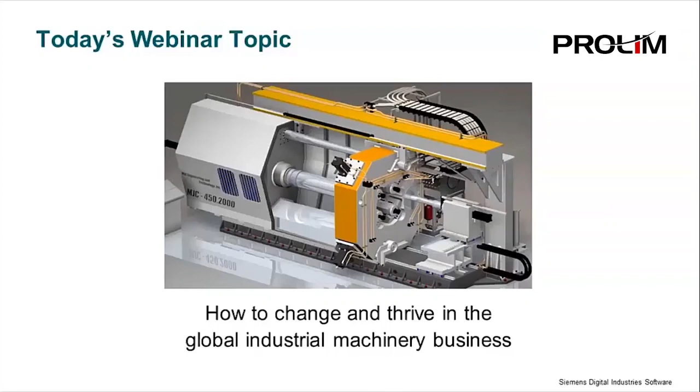I'd like to welcome you to today's Siemens Global webinar. Our topic is how to change and thrive in the global industrial machinery business.

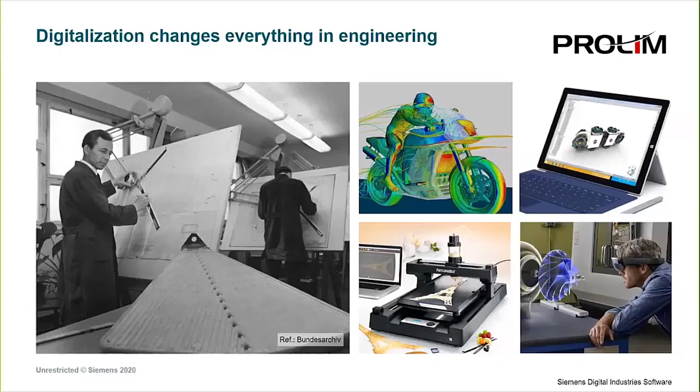And in the manufacturing area, we see trends such as the smart factory, where products going through the manufacturing process report on their status, and the equipment used to manufacture the products also reports on their maintenance and quality issues. We also see increasing deployment of new manufacturing processes involving, for example, additive manufacturing.

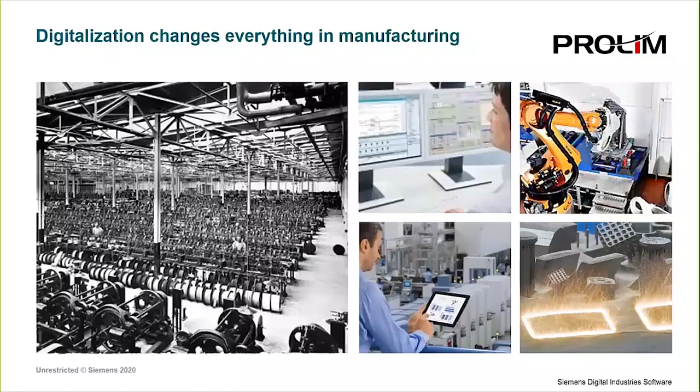And these new technologies are also being deployed for testing and installation. This is sometimes referred to as virtual commissioning, and it enables manufacturers to validate product performance before shipping the product to the customer.

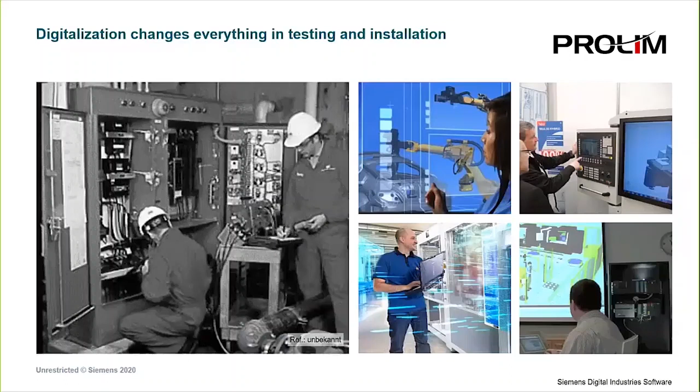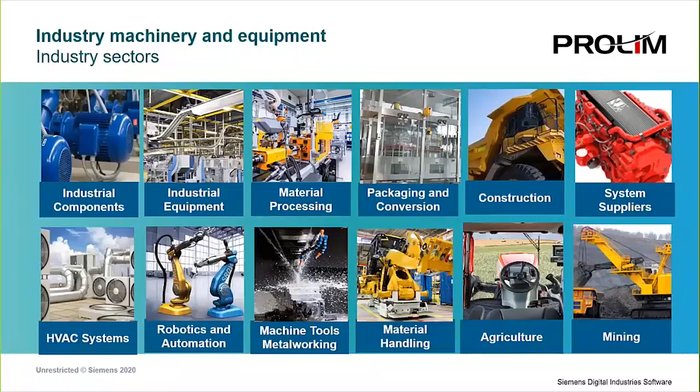Products have changed and the market has changed, your customers have changed. The question we would ask you is, have your engineering processes evolved to meet these changes?

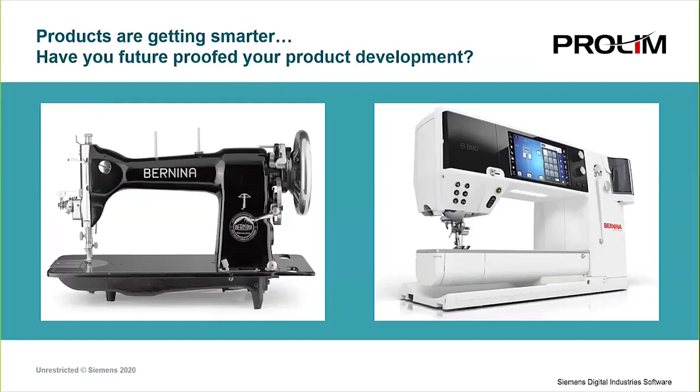A key part of the solution proposed by Siemens is to create a digital twin of your product. This is a detailed 3D digital model of your proposed product. The digital twin can be used as a basis for all areas of product development, including managing customer requirements, concept and detailed design, simulation, manufacturing, installation, and service.

We will discuss how the digital twin helps manufacturers address the challenges they face to bring new products to market quickly and efficiently.

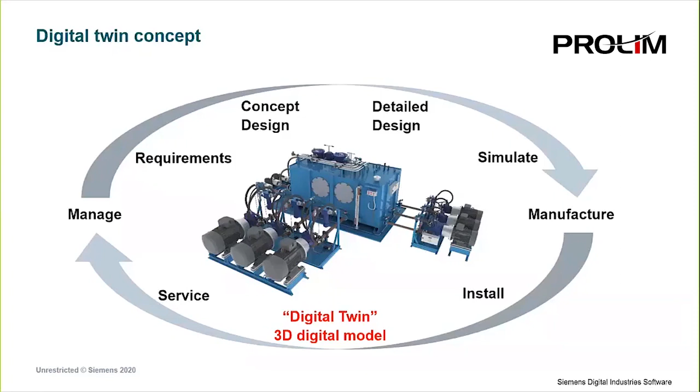At this point, we'd also like to introduce you to Solid Edge, a portfolio of affordable, easy-to-use software tools that address all aspects of the product development process. Solid Edge combines the speed and simplicity of direct modeling with the flexibility and control of parametric design, all made possible with synchronous technology.

Solid Edge enables you to implement the digital twin concept that we saw on the previous slide, enabling digital transformation for startups, small and medium-sized manufacturers, and departments of large enterprises. And Solid Edge is a cross-industry solution used in many different manufacturing sectors.

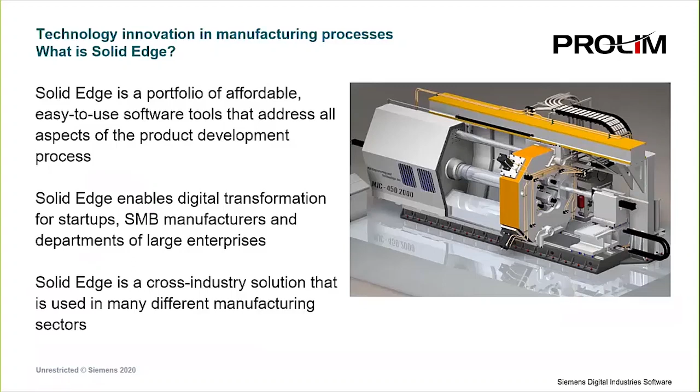Now we'll look at three key trends impacting manufacturers and propose some solutions. The first trend is end-user demand for customized products, resulting in demand for more highly customized machinery. The second trend is increasing electrical content to meet customer demands for more customized and connected machinery. The third trend is increasing pressure to track fulfillment of customer requirements and prove compliance with industry regulations. The impact of these three trends together is increasing complexity of machinery and equipment, and increasing complexity of product development processes.

So what is the impact of this increase in product complexity on the manufacturers of these products? Research from industry analyst Tech-Clarity showed that increasing product complexity can slow the product development process, resulting in delayed time to market, lost revenue, project budget overruns, and poor product quality.

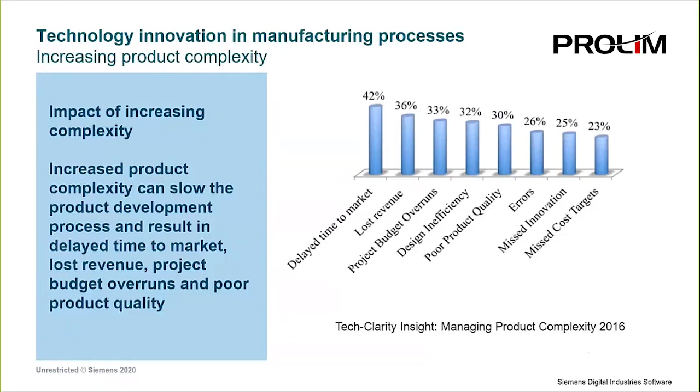We will now look at the trends driving increased product complexity and their solutions in more detail. The first of these three trends is end-user demand for customized products, resulting in demand for more highly customized machinery.

Here is more research from industry analyst Tech-Clarity. This research focused on how top performers in manufacturing differentiate themselves from their competition. The research showed they do this by being faster to provide quotes for their customers, and faster to deliver the final product. These manufacturers also have the capability to include higher levels of customization in their products.

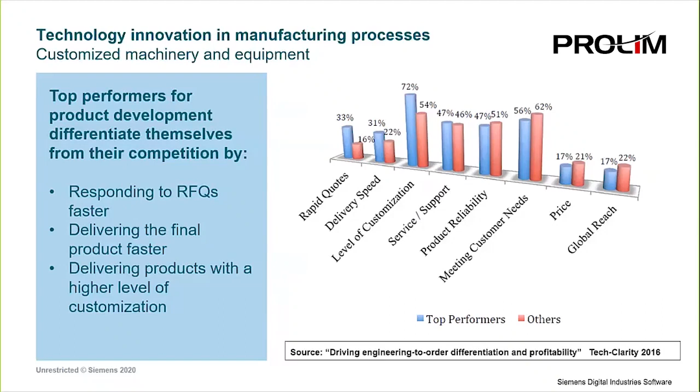Let's look at the challenges, how we can help, and the benefits we see manufacturers achieving in this area. The key challenge is for manufacturers to efficiently engineer products that meet customer specifications while meeting delivery schedules.

We can help by helping you configure products based on family of parts and family of assemblies defined in 3D CAD. This is the basic entry point. We also have more sophisticated solutions, for example, managing options, variants, product configurations, and product costing using an integrated PLM solution. And we have solutions that enable you to automate new product designs using advanced engineering-to-order, or ETO, processes and automation technology.

The benefits manufacturers can achieve include reusing proven components in new design projects. This enables them to reduce risks and speed response to customer RFQs, as well as improve order engineering lead times, throughput, and costs.

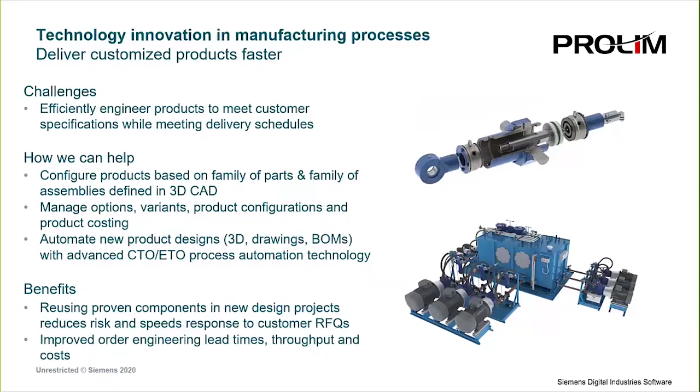Let's talk more about configure-to-order, or CTO, type processes. With CTO processes, the primary design challenge for manufacturers is selecting the right product based on the customer-specified options, where all of the parts have already been designed, or at least defined as families of similar parts and assemblies.

The enabling solutions in this area are based within our 3D CAD solution, including the ability to create family of parts and family of assemblies within the CAD environment. These are typically driven by Excel spreadsheets or variable tables. Specifically with our Solid Edge 3D CAD solution, we refer to these as Solid Edge family of parts and Solid Edge family of assemblies.

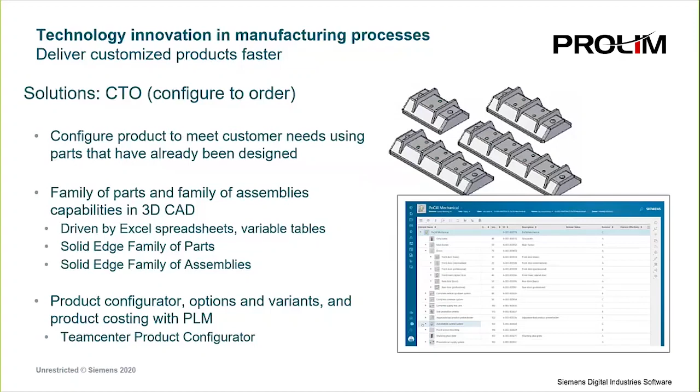The next level up is using a PLM solution, in our case Teamcenter Product Configurator, to actually enable you to drive product configuration, options and variants, and even product costing as well. So that was the CTO, or configure to order, area.

The next area of complexity is engineer to order. With ETO, the primary design challenge is rapidly designing new parts and assemblies to meet unique customer specifications based on your own engineering and manufacturing capabilities. Here we have a solution called Rulestream, which applies standards-based engineering to enable you to support custom manufacturing.

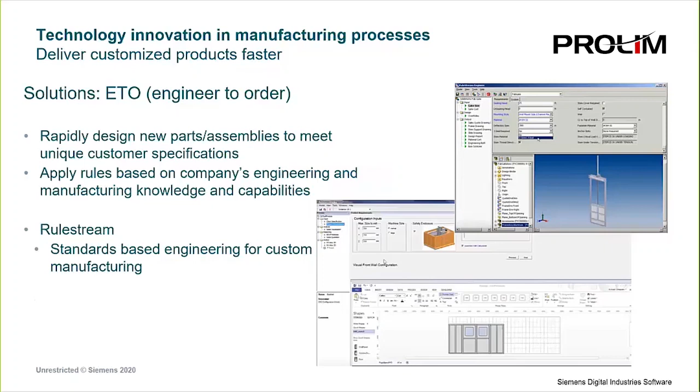The second area that we'll look at in terms of trends impacting manufacturers is increasing electrical content, required to meet customer demands for more intelligent and connected products.

Here are some results of a recent survey of design teams run by engineering.com. The survey asked about the value attributed to electrical and electronic systems in current design projects. The majority of respondents, 71%, all design engineers, said that the value attributable to electrical systems in their products is increasing, and fully 37% said that the value attributable to electrical systems is increasing significantly. We forecast that this trend will continue to grow.

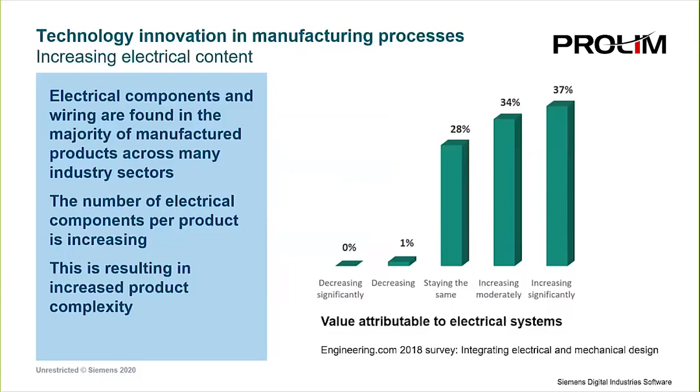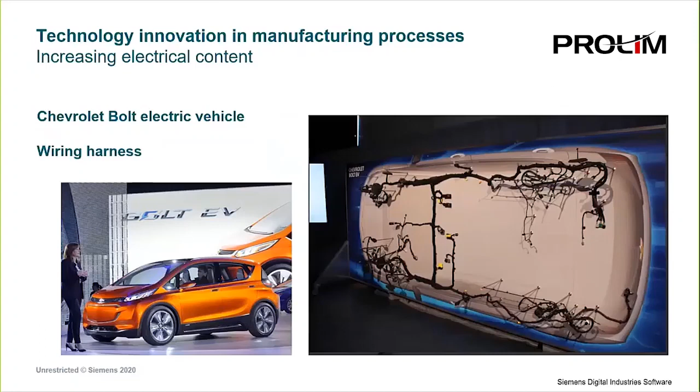On this slide, we see the wiring harness for the Chevy Bolt electric vehicle with the advanced driver assist systems. These are systems including, for example, automatic braking and automatic parking. These types of systems require more cameras and sensors, and you can see the huge increase in the complexity of the wiring harness for these additions to the capabilities of the vehicle.

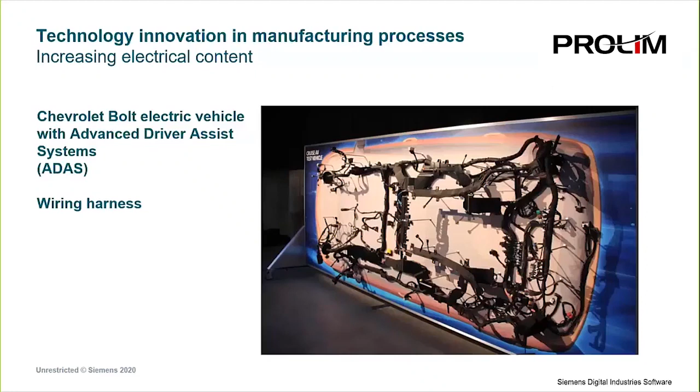Let's look at another example. In this case, one of our own customers, a manufacturer called Thermoplan, who manufacture coffee machines for commercial establishments. Even in this relatively small piece of equipment, you can see that the wiring harness is fairly complex.

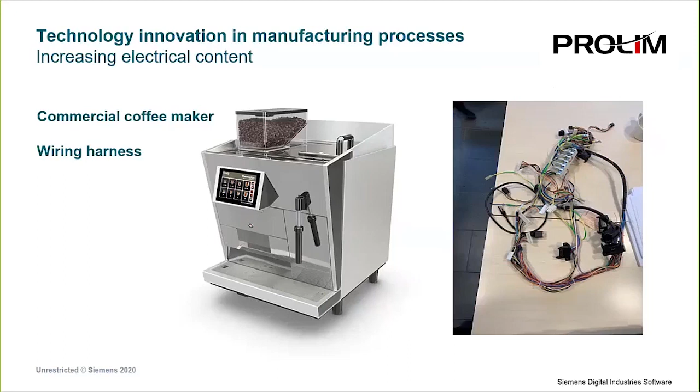Thermoplan is using Solid Edge from Siemens for 3D mechanical design, but they were actually using a fairly basic electrical design software package, which had really no intelligence built into it. By adding Solid Edge wiring design, they've been able to create intelligent wiring diagrams that enable them to run qualitative and quantitative analysis on their electrical circuits and integrate them into their mechanical designs. With the small size of this piece of equipment, routing these wires within the confines of this equipment is a very important task for them to do as well.

So mechanical and electrical engineers need to work together more effectively throughout the product development process. This is true whether they are in different locations, in the same office, or sometimes, in the case of small manufacturing companies and startup manufacturers, they may even be the same person.

The recent Engineering.com survey also looked at the areas where project teams are losing time due to electromechanical design issues. For example, lack of communication between electrical and mechanical design teams was one of these areas identified, and the need for repeated testing and prototyping was another impact of this increasing complexity of electrical components in otherwise mechanical products.

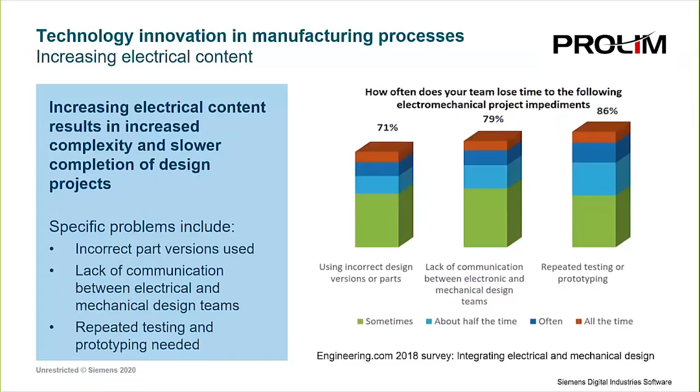So for products that include an increasing number of electrical components, designers need to be able to answer questions like: do the signal wires have enough strength for the receiving component? Are the wire diameters sized properly to carry the current? And are the fuses the proper size?

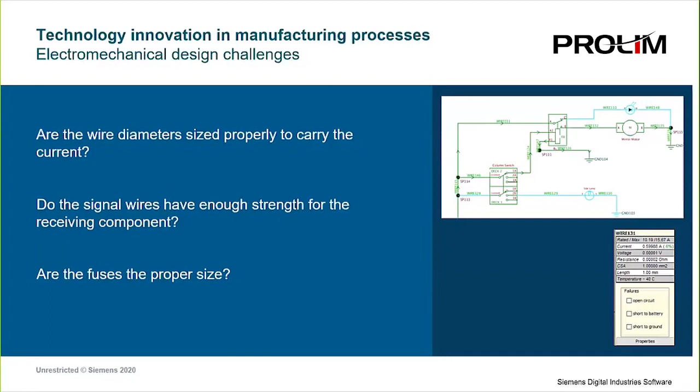In the area of electromechanical design, they need to look at issues like: are wires rubbing on any mechanical components? Are the wires running in hot areas of the assembly? And is there enough room for the wire harness around the mechanical assembly?

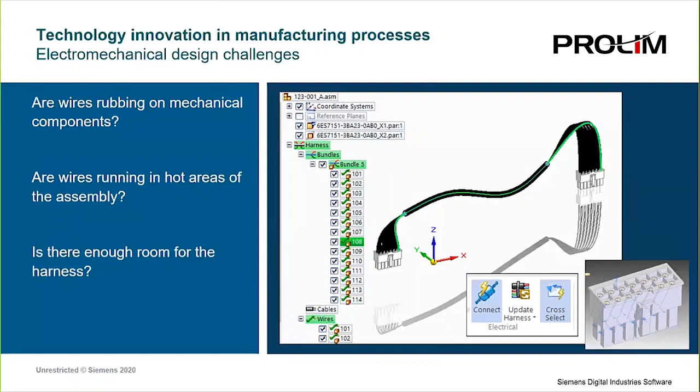A possibility for addressing the trend of increasing electrical complexity in manufactured products is to implement software tools that have been developed to enable electrical and mechanical engineers to work together. These tools exchange data interactively between the mechanical and electrical environments and make it easy for engineers to see and react to changes made in the different disciplines.

In this example, the electrical engineer determines that two electrical components need to be connected by a wire. The mechanical engineer receives the information about this connectivity requirement and routes the wire in the 3D mechanical assembly model. This determines the physical length of the wire, and this information is fed back to the electrical engineer, who can now accurately simulate the voltage drop in the wire and ensure that the optimum wire size is used.

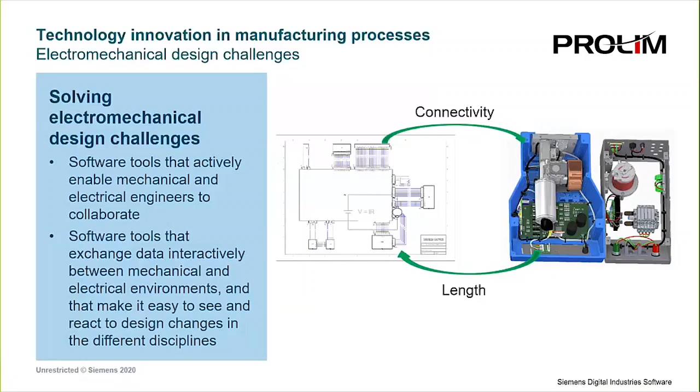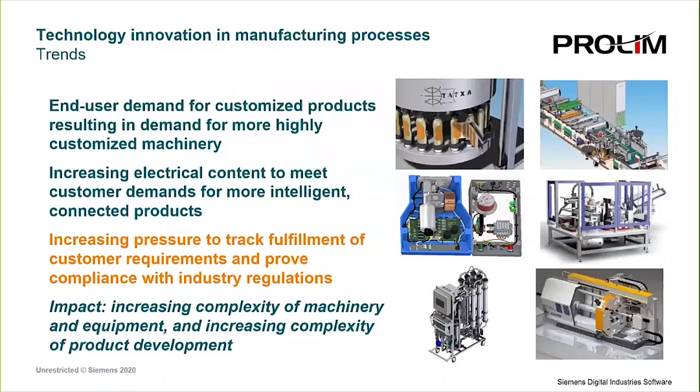The third area we will examine is increasing pressure to track fulfillment of customer requirements and also proving compliance with industry regulations. In this area, we see that the complexity of customer requirements is continually increasing, and also that the cost of non-compliance with customer requirements and industry regulations can be very high.

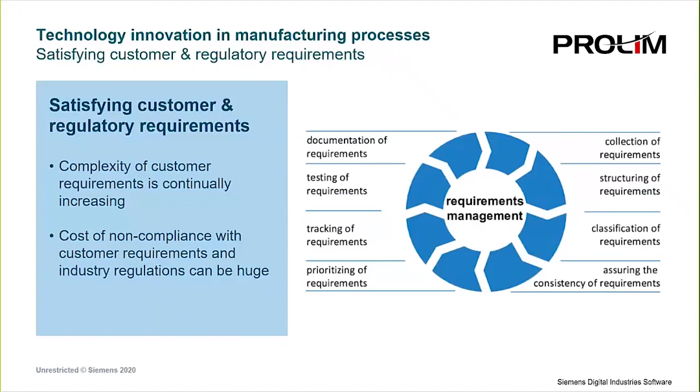Let's look at a couple of examples of where product requirements were not tracked and met. This first one is the Samsung 7 notebook, which had a major issue with overheating and even causing fires. The problem was that the battery was expanding within too tight confines, and the negative electrode became bent around the positive electrode. In turn, this caused a short circuit and overheating and fires. The impact for this manufacturer was the recall of 2.5 million Galaxy Note 7s and a total cost to the manufacturer of around $5 billion.

The requirement, which was not met by this product, was that the design should allow for normal expansion and contraction of the battery that occurs with normal charge and discharge cycles. So somehow in the design process, this basic, very fundamental requirement was not logged and not tracked through the product development process.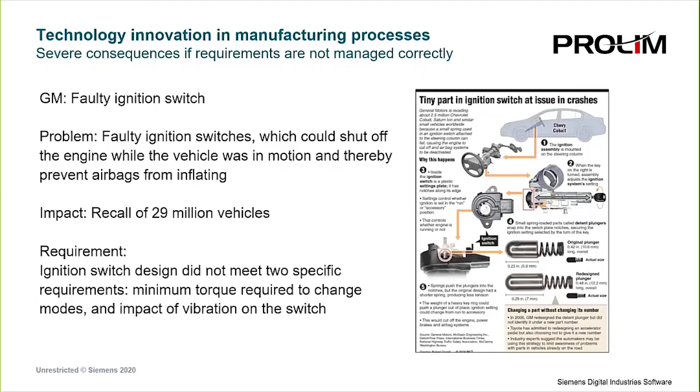One question we will ask you today is, how do you manage customer requirements for the products you design and manufacture? Most of the manufacturers we speak to are using office applications like Word, Excel, and emails to manage their requirements. This means that requirements are not linked precisely to design projects, and that requirements are not easily visible and retrievable by the engineers who are responsible for implementing them.

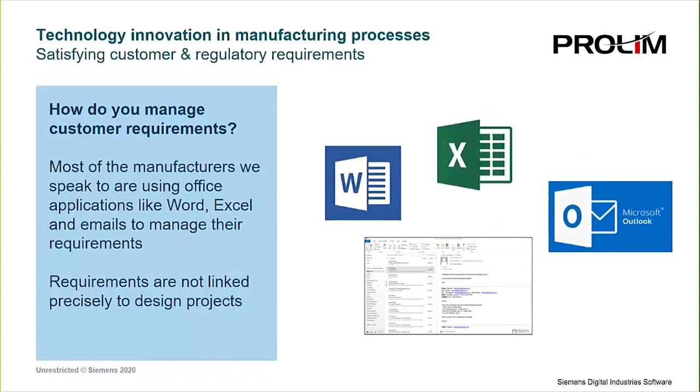In addition to managing customer requirements, it is also essential to be able to prove compliance with pertinent regulations. This has a big impact on how you manage and document your design and manufacturing processes. Software solutions are available that enable requirements, both customer and regulatory requirements, to be documented, linked to product designs, and tracked throughout the product development process.

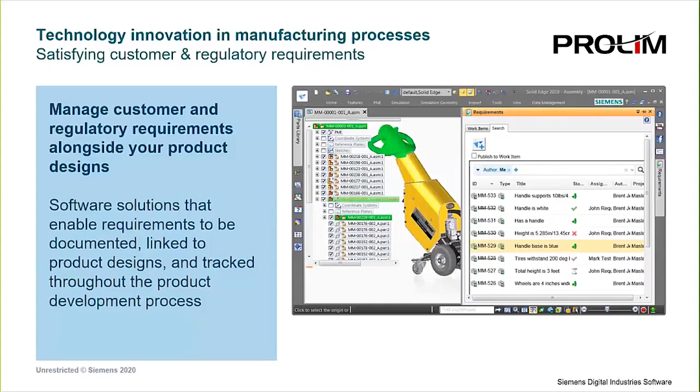We see that implementing a solution for requirements management can result in the following benefits for designers and project managers. Firstly, that requirements are captured and managed in a consistent and repeatable way. Designers can more easily assess the impact of proposed design and requirements changes. An overall project progress can be tracked and reported on as requirements are implemented and approved. And project managers can reuse requirements on new but similar projects.

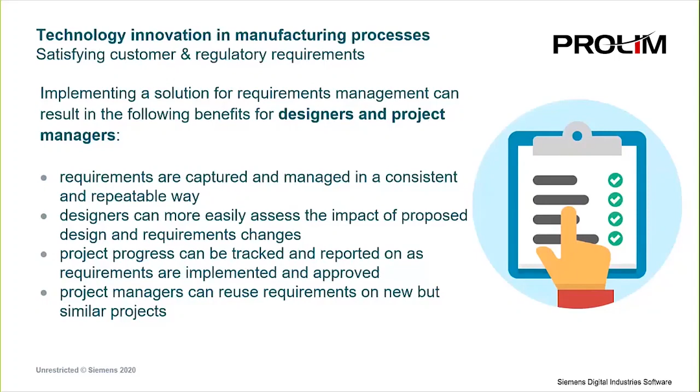In this area, we have a specific solution called Solid Edge Requirements Management. Here, users can work directly with their CAD data while simultaneously managing requirements. We actually link requirements directly to CAD files and make these requirements easily visible to designers. They're able to track the fulfillment of requirements and report easily on the status of requirements for project managers. Throughout this whole process, an audit trail is maintained for all actions performed on a specific requirement.

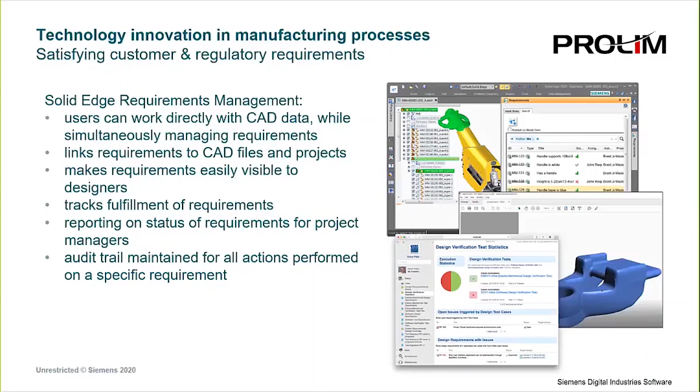Here is a quote from one of our customers, one of our early adopters of this technology, Scott Vertel from Aero R&D. They had this same issue where collating product requirements from many different sources was very difficult for them. But they could see that using Solid Edge Requirements Management, they could have a tool to collect all those requirements in a consistent way, and that they could do this from right within their design software.

At this point, let's cover 3 case studies of manufacturers who have implemented Solid Edge to improve their product development process.

The first of these is a company called Control Microsystems here in the USA. They're a manufacturer of industrial laser-based systems. Some of the business challenges they faced were fulfilling very specific customer requirements with custom solutions, and in general, developing innovative applications of laser technology.

Some of their keys to success have been implementing Solid Edge for fast completion of new design projects and modifications of existing designs. They are one example of a manufacturer who has created a digital twin of the products they design and manufacture, and they use this digital twin throughout the company.

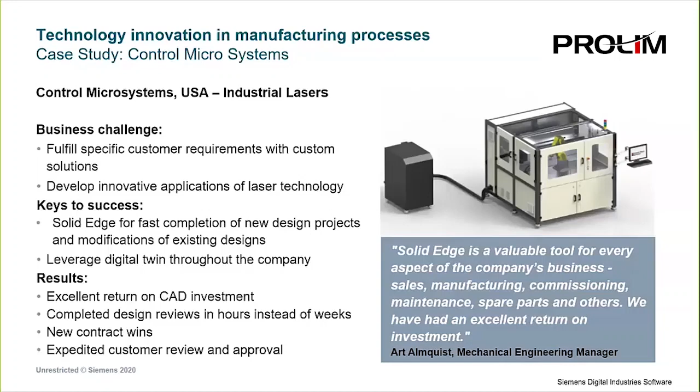Another case study is from this company, Tecnofer in Italy, who manufacture machinery for plastics recycling. Some of the challenges Tecnofer faced included the need to accelerate development of very custom machinery, and also being able to simulate critical components to minimize failures in the machinery they manufacture.

Some of their keys to success include using Solid Edge for assembly design with integrated finite element analysis capabilities to look at those critical components and minimize failures, but also making fast design changes to meet specific customer needs. Some of the results they have achieved include decreased lead time for product development.

Optimizing components using virtual simulation minimized the amount of physical prototyping they needed to do, which adds cost and time to their product development process, reducing material costs, testing and design time, and in general enabling them to provide continuous innovation for their design-for-recycling machinery.

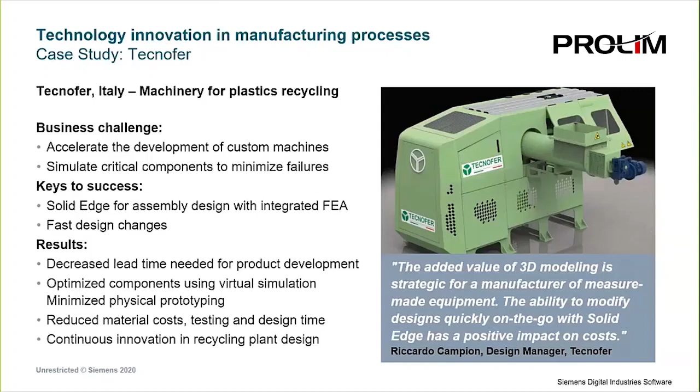The final case study is this company Thermoplan, which we looked at earlier. Thermoplan is based in Switzerland and manufactures commercial coffee machines. Some of the challenges Thermoplan faced included packaging complex mechanical and electrical components in a small footprint, and generally time-to-market pressures to bring new designs to market.

For them, some of their keys to success included using Solid Edge for design of assemblies with up to 3,000 parts, and modularization and standardization of these designs using the built-in data management capabilities that come as a standard part of the Solid Edge software.

Some of the results they've been able to achieve include the management of large assemblies with up to 3,000 parts, easy modularization of these assemblies using integrated data management, and also photorealistic visualization of their designs for customer presentations.

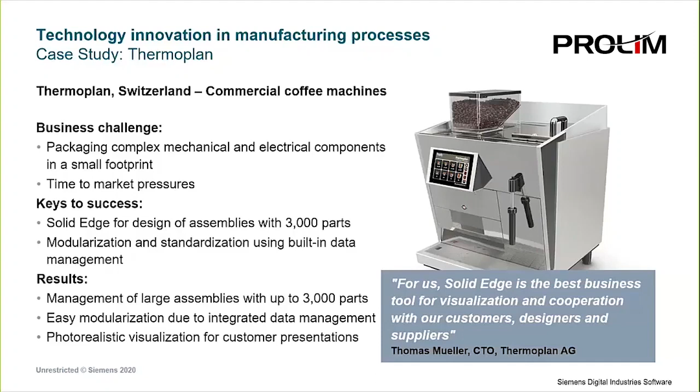So I think you can see how it enables you as a manufacturer to create a digital twin of your product and use it, adding data and intelligence to it throughout the product development process.